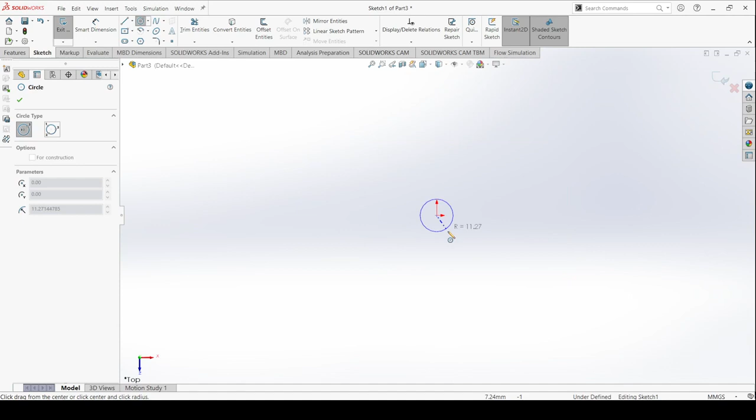We're going to start by drawing a circle because the general design of our vertical wind turbine is circle based. Click and size it anything for now since you can size it later using smart dimension. It's good practice to smart dimension everything.

What smart dimension does is define a dimension set by the software and saved permanently, meaning if you drag the mouse around later it will never change since it's locked into the system. It will only change if you click on it and edit it directly. For this, the units are millimeters, but you can change them to whatever you like.

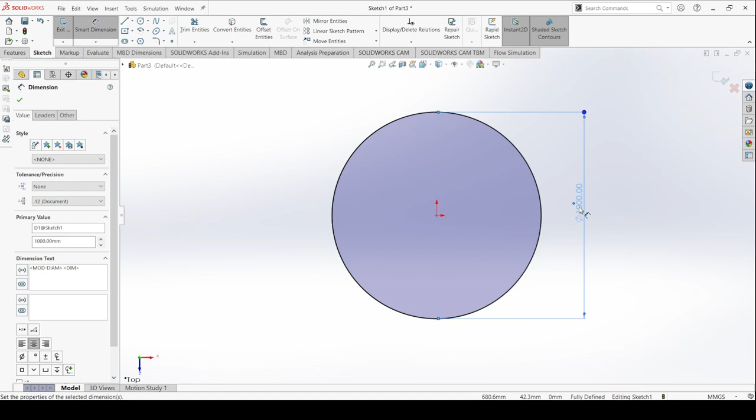I'll delete this and make it 1,000 — that's the diameter of the circle. Now it's dimensioned. Just to make sure it's in millimeters, double click to check. Yep, it's millimeters. Click OK, and now we have the circle drawn.

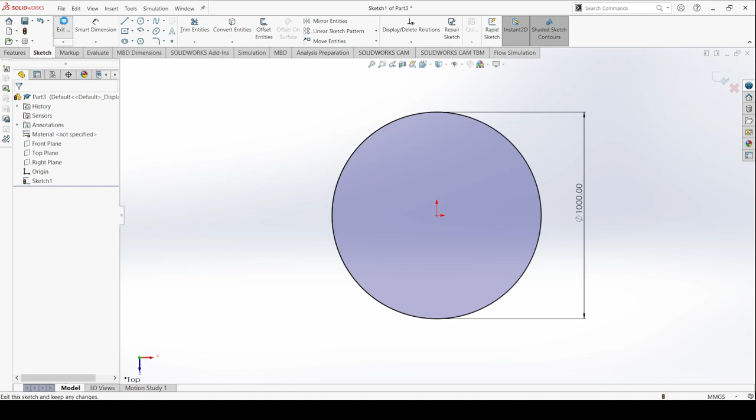We need to go now to Features. If you exit sketch, it will hide, and this is what you have. You can keep the sketch on or off, doesn't matter really.

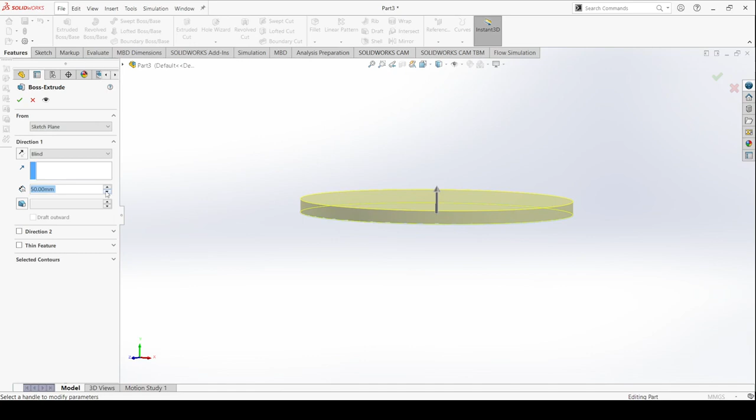Now we go to a feature called Extruded Boss/Base. This arrow shows the direction the extrusion is going, and this is the height, or thickness, of the extrusion. You can increase or decrease it from here. I'm just going to keep it at 10 millimeters.

Here you choose the direction: blind, offset from surface, up to body, or mid-plane. Mid-plane means it will expand from both sides of the plane we drew on. I'm going to demonstrate it now — see? So I'll just keep it blind.

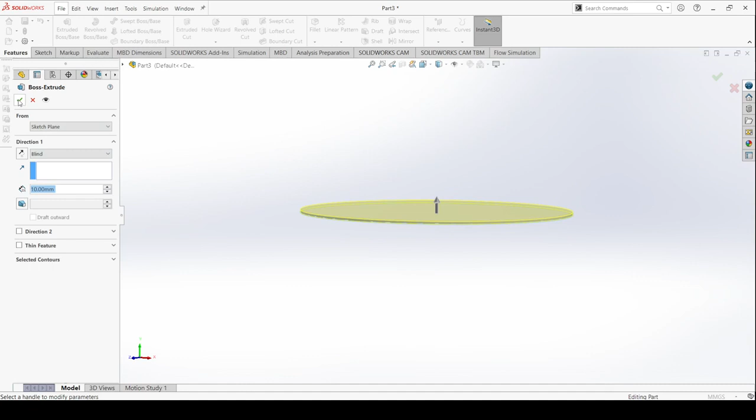Click OK. It's also good practice to define a material, since it's not defined yet. Click Edit Material, and you can see there are a lot of materials here — iron, aluminum, copper, titanium, plastic, other metals.

There's also wood, rubber, and silicon, and all of them display properties below, like elastic modulus, yield stress, and density. So you choose the material you like for your wind turbine — I'm going to choose, just for the sake of it, copper.

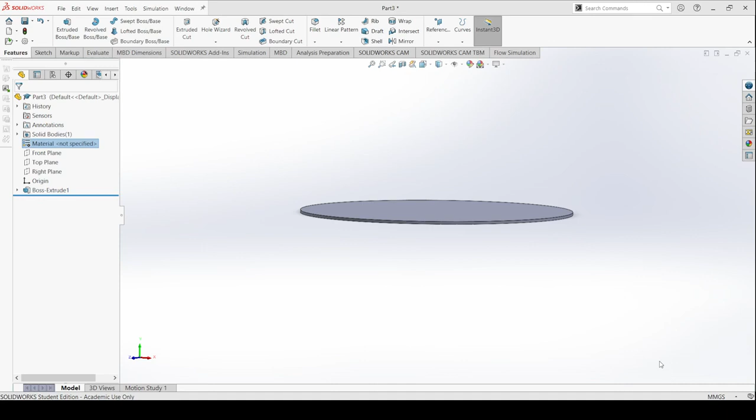Actually, I'm going to choose brass. If you click Apply, see how the color changes. Now click Close.

Now whatever we build will be from the same material. You can change it later and define each part individually, but it's good to set it from the beginning since everything we build will share the same material. Now we're going to start building and drawing the blades.

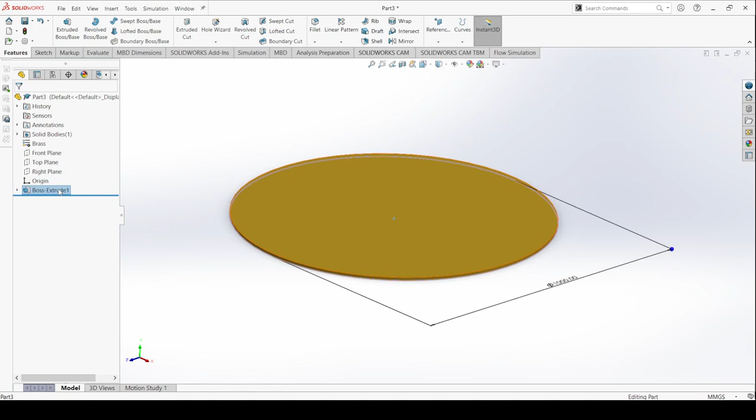For the blades, we need to sketch. This is the original sketch without the extrusion, but we don't need that — we actually need to draw on the face itself. I'm going to click Normal To, which will flip it to face me, the original side. You can see, if you click, now this is facing you.

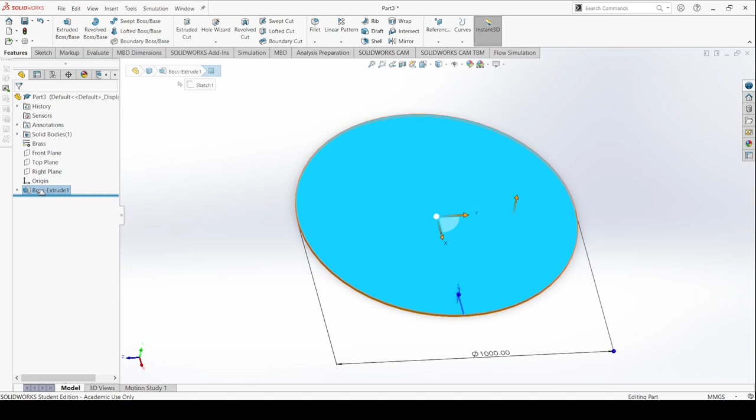Click on the face itself, not Sketch, just the face. Now you see it shows this face, not the bottom, just the top. Click Normal To — so we chose this face. Now if we click Sketch, it will sketch on this face.

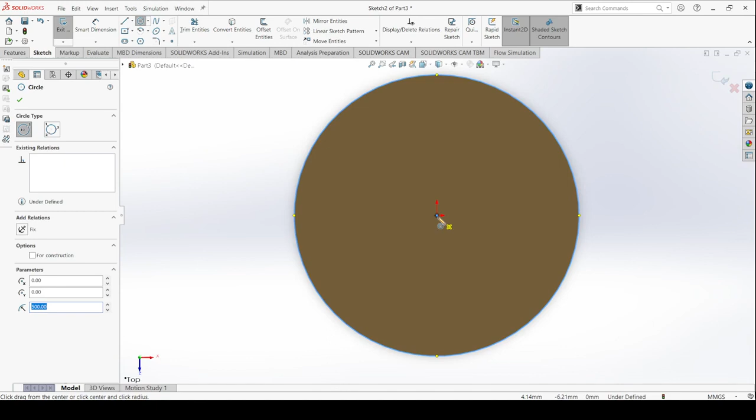I'm going to click a circle, choose the middle, and draw the first circle out to 500. The second circle we need to define the width of our blade — the smaller the circle, the wider our blades will be. So I'm going to keep it around 370 or 375. I'll click here, go down, and define it as 375 millimeters — that's the size.

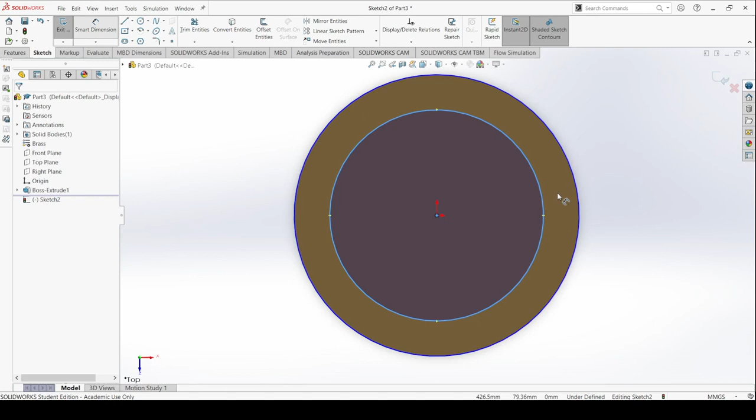You can smart dimension those as well if you like. So if you click here, we'll dimension it as 750.

Okay, and here as well it will define this is the same. This will help you if you're trying to make drawings from this later, if you're trying to build it actually and you want to print a paper. Click OK. Now we have it defined.

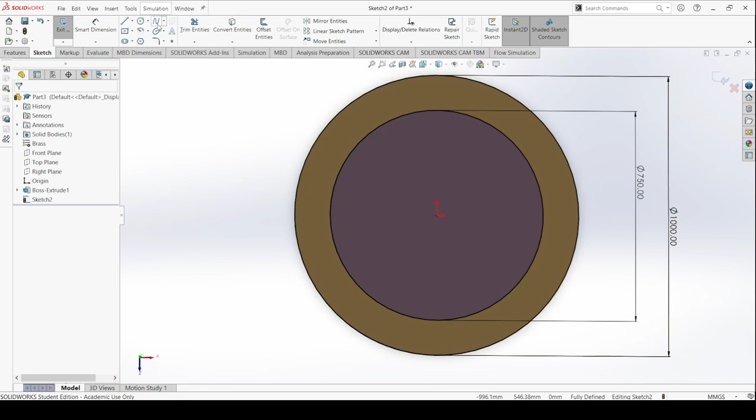Now we need to still draw in this face, and we need something called a spline. Why do we need a spline? Because a spline is easy to draw and manipulate. Start from here and click in the middle anywhere. You can change this later as well, I'll show you how. Now to exit the spline, once you're done, just click escape.

Make sure everything is connecting to all the lines, because this is very important. Now see where we clicked. Whenever you clicked, if you move, we'll create a curvature, so it depends on how curved you want your blade to be. Right now we can curve it this way. We can run simulation and run it again to a different curvature and see which one fits your project.

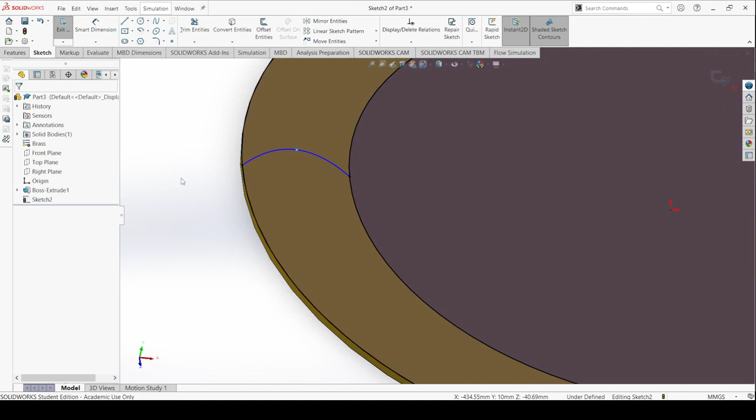Click OK, and now we go to features. I'm putting this to the side just to show you a better view. Extrude, and we click here on the line to extrude it. But see, it's a bit thick, so if you want to change the thickness, go to thin feature. Do not unclick this, just keep it.

Here is 10, let's make it 5 millimeters. See, it became thinner. And here we define the height.

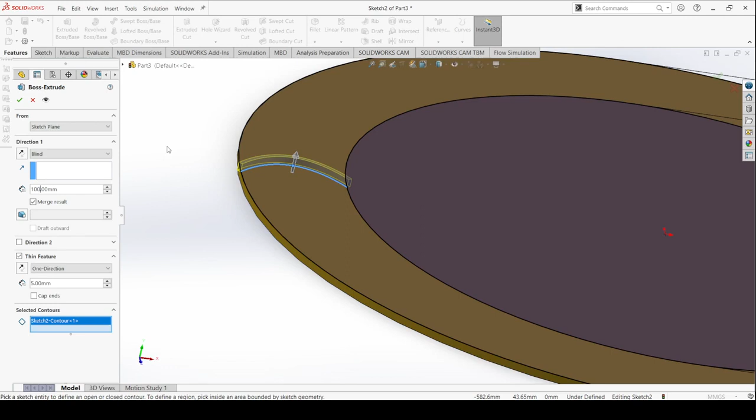Make sure you untick merge result, I'm going to show you how now. I'm going to keep it, going to give it a height of 1000 as well, or give it a height of 1050, whatever you like. This is a preview, you still haven't created the part. You can see how tall it is. If you want to shorten it a little bit, you can do so by reducing the height.

I'm just going to keep it, but I need to untick this. Why? Because if I don't untick this, whatever I'm extruding will join with this and become one part. This will make it hard for me to manipulate the drawings later, or to actually create the part and copy and paste it anywhere, or duplicate it. So unmerge - you can merge them later as one part in the setting if you want to.

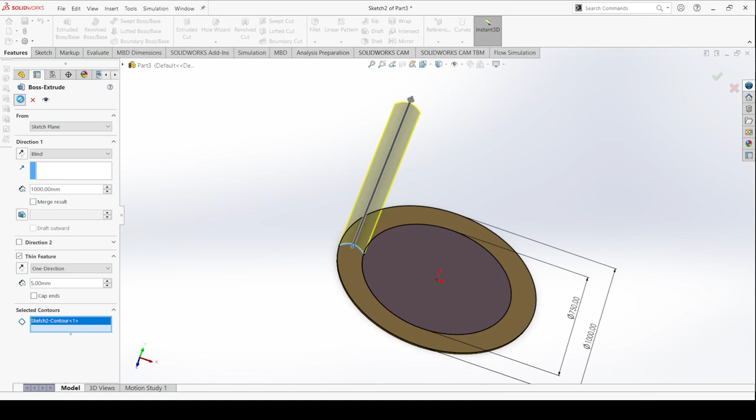Now we click this. See, now we have the part drawn here.

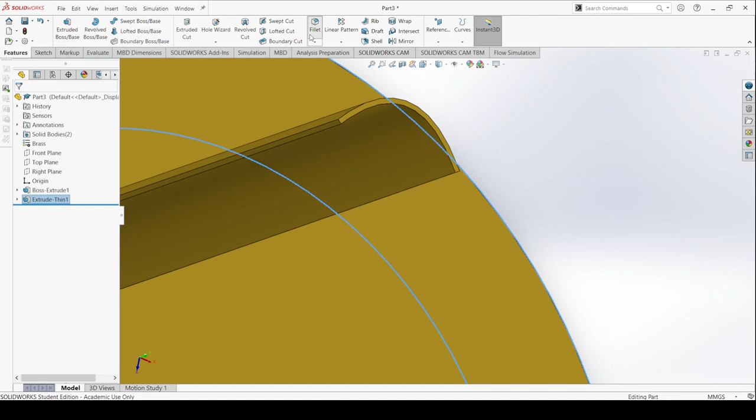Since this is a blade and it's interacting with the wind, it's also good to make it a little round, and to do so you choose a feature called fillet and click this edge and this edge. But because the radius is a bit large, it will give us an error, so you need to change the radius, because it treats a fillet or a corner to smooth it, like a circle, so you need to reduce it so it will be logical.

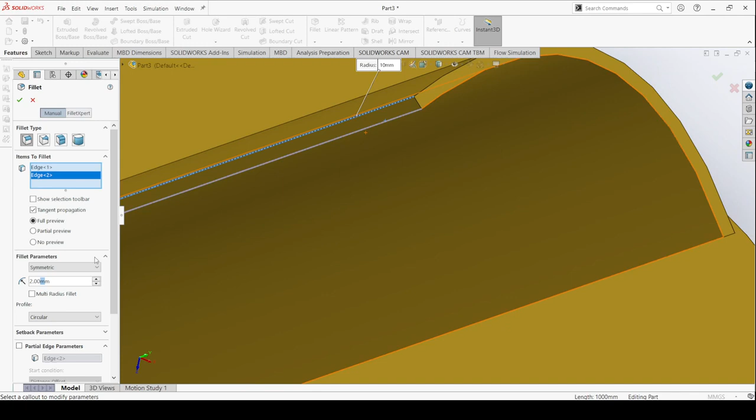Let's see, 2 millimeters, and see how it goes. Alright, there we go. Here, let's increase it to 3 millimeters, try to get as much result as we can. Oh, this is better. So just click OK, or you can just, while you're doing it, go to the other side and click here and click here and click OK.

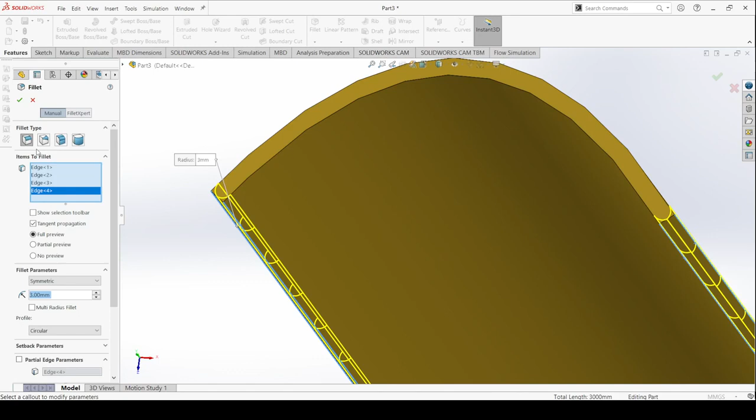The reason we're doing this now is because we're duplicating this part, so we need to make it as good as we can, then we duplicate it.

Now since this is a circle and this is a part, you can copy and paste and try to adjust it, but it will be a very hard process, because you want to align all the blades at even distance in this circle. So we're going to use a feature called linear pattern, but click on the arrow and make sure we choose circular pattern.

Click bodies. See, because we didn't merge this, we can choose it on its own. If we didn't untick the merge, and we click, it will choose the whole thing, because this one and the base are merged together. But now, since it's not merged, we can choose it by itself. Now choose equal spacing, 360, and the number of blades.

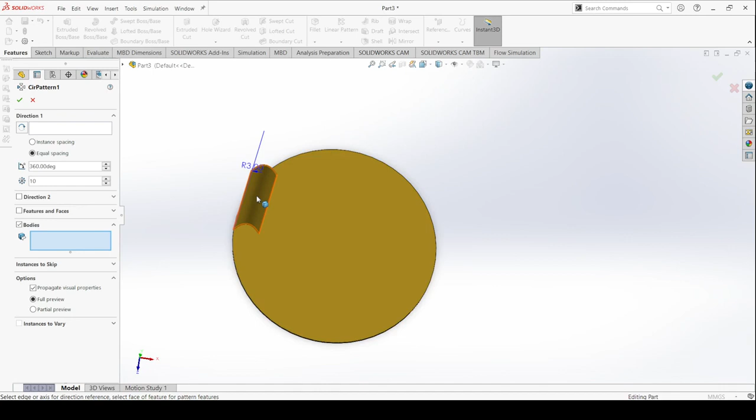Okay, I'm going to see - no, actually choose the fillet. We don't want the fillet, we want the part itself. Okay, oh sorry, clear selection, going to choose here. Okay, and yeah, click OK.

Okay, select sketch. We need to go here, actually, not here, and just choose this. Okay, choose bodies. Click here. We are facing a problem, just let me figure it out.

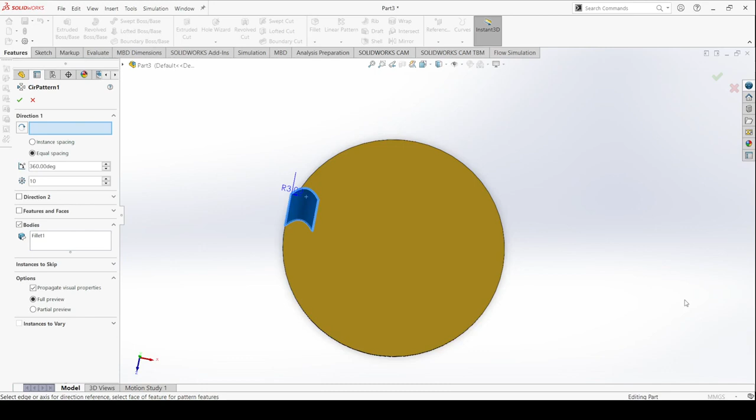I need to choose this part because we need to be circled around something. You can increase the number and decrease it as much as you like. Here's 10. This is a preview, meaning it's not created yet, so choose blades that fit your project. I'm gonna keep it at even 10.

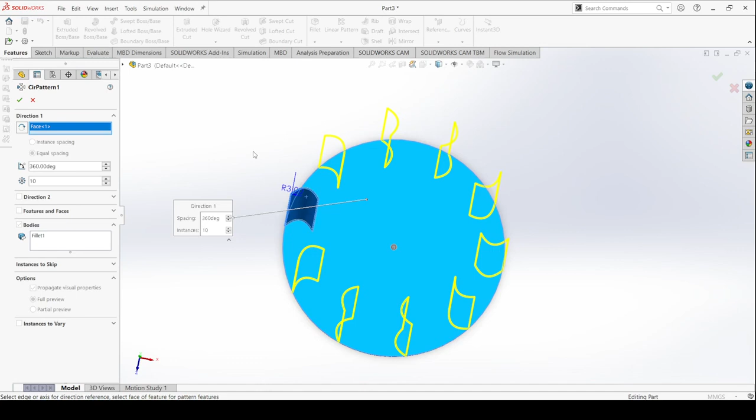Okay, it's a bit slow. Now 10, and click OK. And now click OK. Voila, see, it's created at the same height, at even distance of each other.

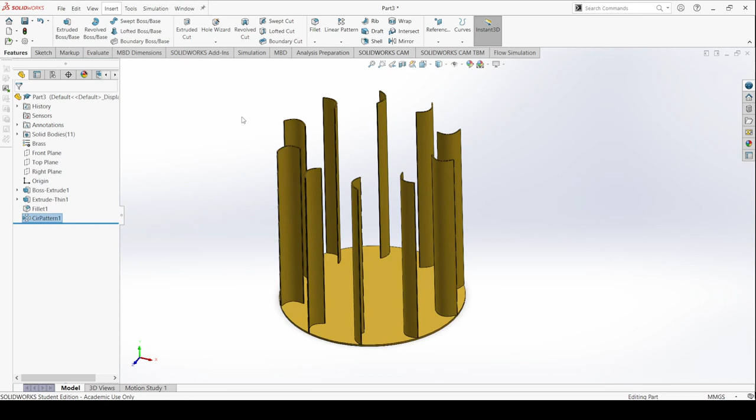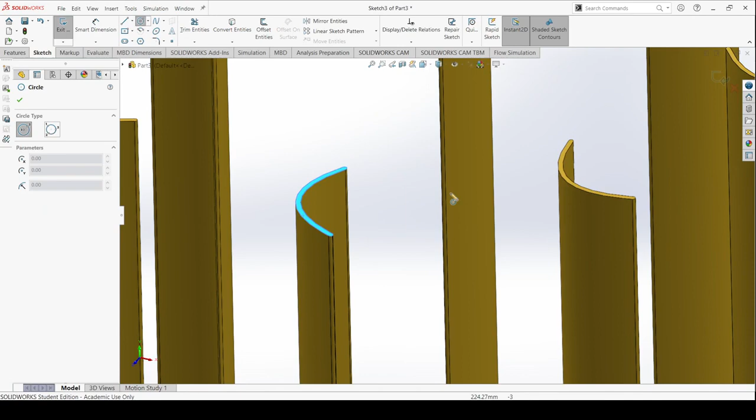What we want now is the final step of completing our turbine: to draw the top plate. To do so, to make sure you're doing it correctly, just go to the face here, the top of any blade, click sketch, click circle. Why? Because we want to make sure the circle we're drawing actually touches all the surfaces of the blades, and since they are at the same height, choosing one will be sufficient.

Okay, just put it at any size and size it as before. Okay, 500. Okay, and click OK.

Same thing. There are actually many ways to do this. You can extrude, copy this and put it here or something, but this is much easier, much more convenient. And extrude.

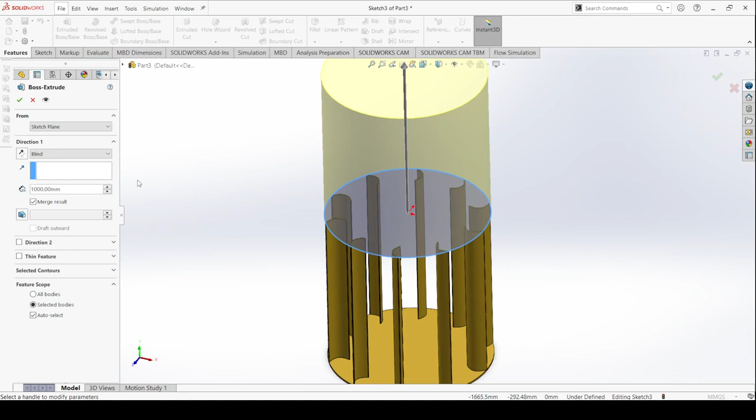It's going to extrude this to a very long height, because last time we actually chose this feature when we chose the height of the blades or the height of the turbine, plus or minus 10 millimeters. Okay, there we go. Now click OK.

We did merge this with those. You can unmerge them. Okay.

Now we are done with our wind turbine. Okay, this is the final product. Click Save and save it where you desire.

I'm going to save it in this file and just call it VAWT, vertical axis wind turbine. Okay, click Save.

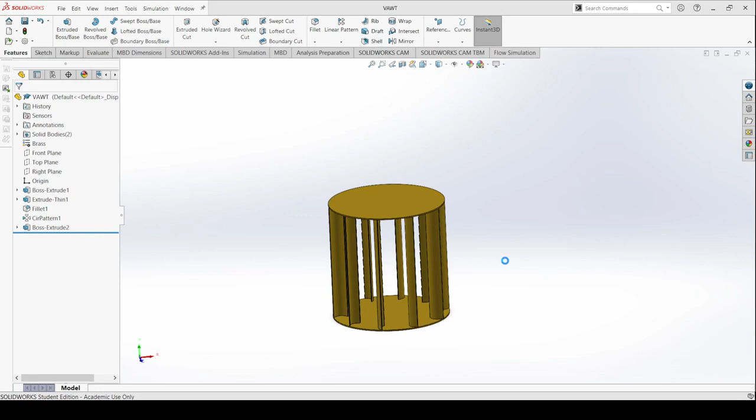And now we go to File, New, and for this we're gonna just draw a tunnel, a test tunnel. We're gonna need it to conduct our flow simulation.

Choose top plane, right plane, whatever you desire. I'm just gonna keep on top plane, since I started drawing on top plane in the first place.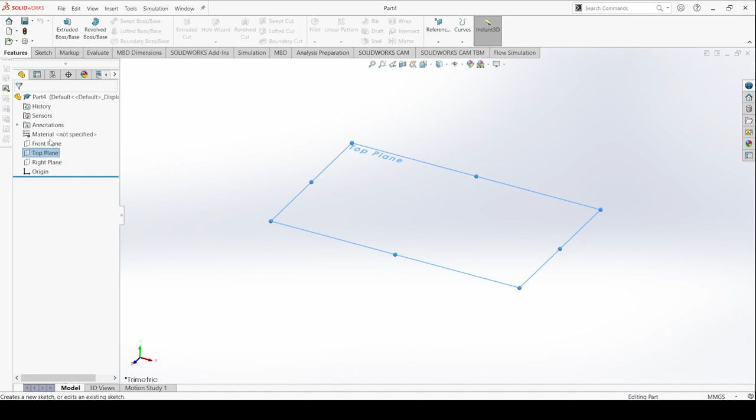For this we're gonna choose rectangle, but I'm gonna choose center rectangle, so I know I drew it from the center, and it's very convenient. I'm actually gonna click undo, and sorry, center, and now...

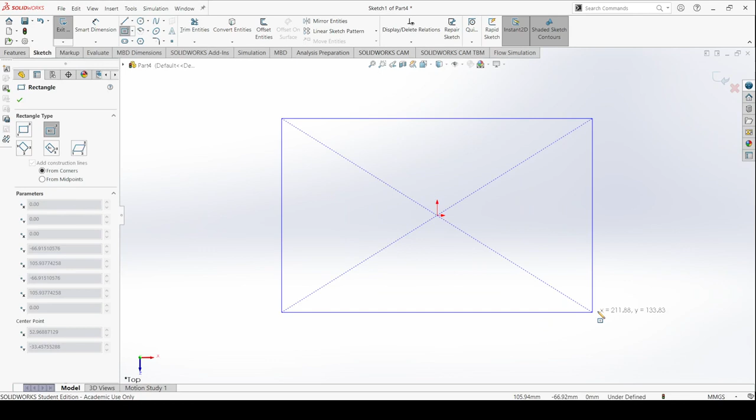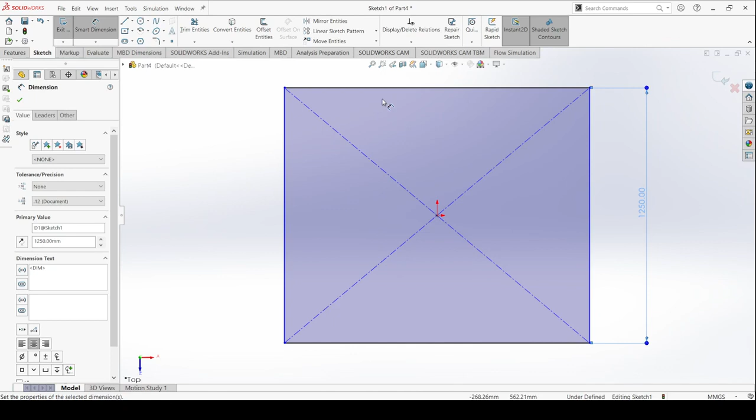Okay, just any shape, because you still can smart dimension it. I'm gonna smart dimension it a little bigger than our turbine, because we're gonna place our turbine here. So I'm just gonna make it 1250 millimeters. Okay, same here for this side, or the bottom, doesn't really matter.

Okay, 1250 millimeters. Okay, now it's fully defined.

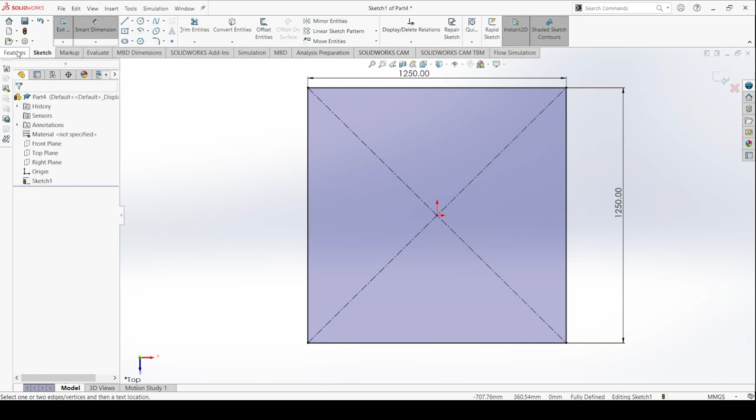Go back to features, click extrude, and for this we are going to choose mid plane and make it, let's just make it 1300 millimeters. Okay, now we have this box. Click OK.

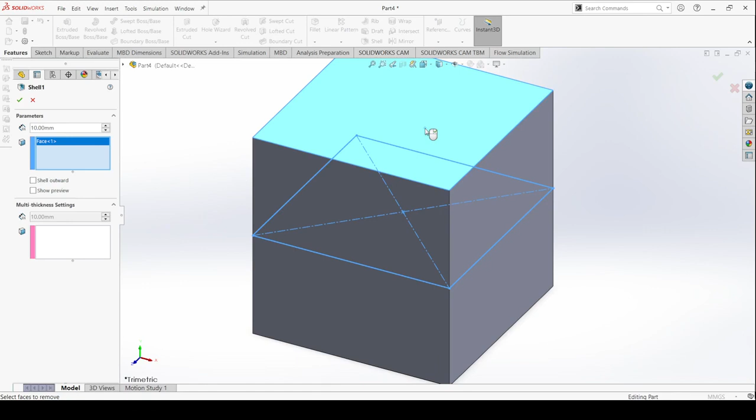We've got a feature called, because we want to make a tunnel, we go to the feature called shell. Choose here and flip it, and choose here, 10 millimeters. That will be the thickness of the walls of the tunnel. You can increase it to 20, whatever you like. I'm going to make it 20. Okay, click OK, and now we have the spot.

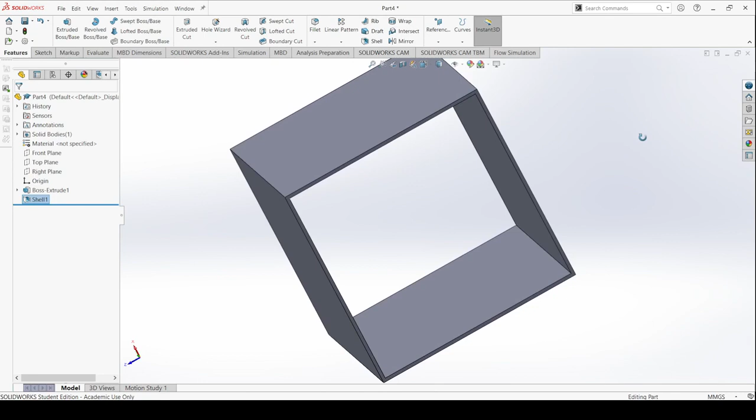Okay, now after we created the shell, we need to save it, because we're going to join these two parts together, and then I'm just going to call it wind tunnel. Click save.

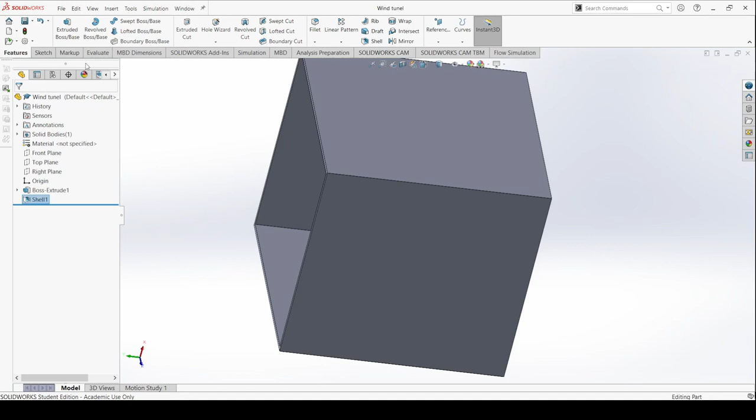And now you can close all of them because you already saved them, and start anew, but this time do not choose part, choose assembly, because you can assemble those two parts together.

It's taking a little bit of time, but be patient. Now it is opening. Okay, see how it's already located the two files. Just click open, choose them and click open.

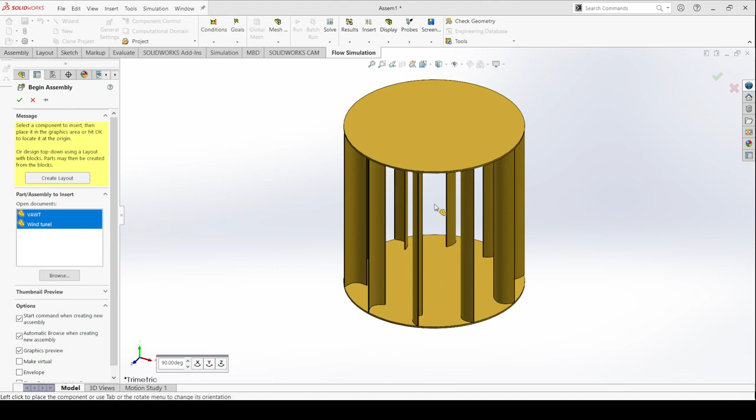Just click anywhere, just place it anywhere, and the tunnel itself, you can place it anywhere. Okay, and now just...

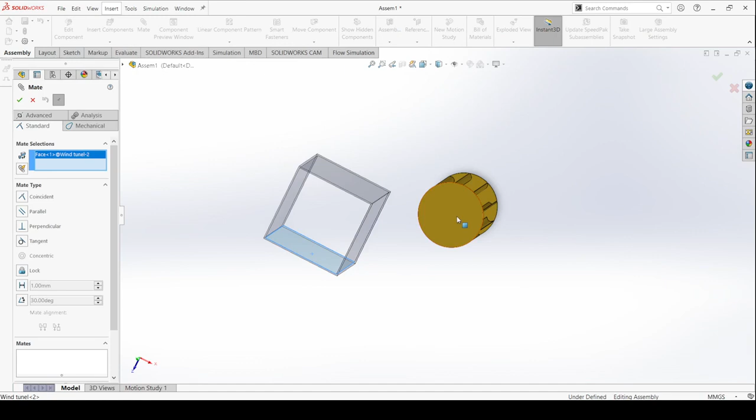To align these two parts, you need to choose a feature in SolidWorks called Mate. Choose the inside of the box with the surface and just click OK. It's supposed to be Mate, but what you need is go to Advanced, Profile Center, okay, and click OK.

Okay, make sure that you click OK.

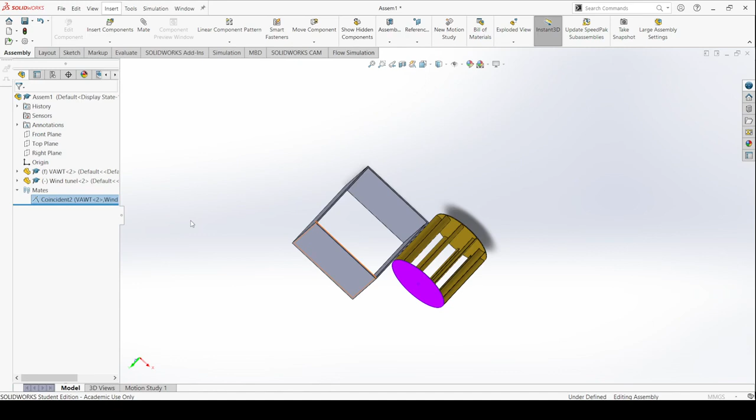Now we edit the feature. Because we chose this face with this face, go to Advanced, click Center. See how it did it? It actually took it to the center of this face. Now you click OK. You can make it a little bit further if you like.

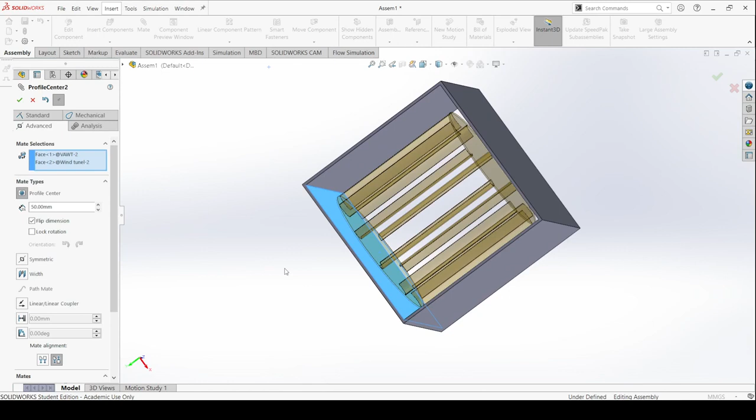Because of the axis we're having, it's actually going the other way around. You can flip dimension, and see now if you increase, it will actually keep a gap between the face and the bottom of the plate of the turbine, but it's gonna still stay in its place.

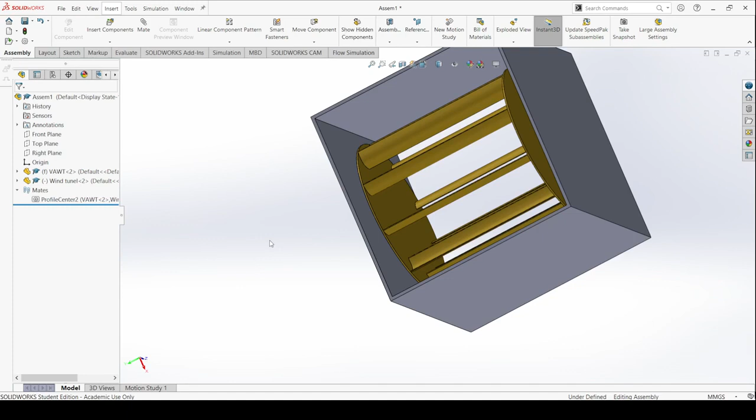Now we click OK. Now after we click OK in Mate, now it's saved. Before it was not saved. Now we can click here just to make sure it's facing us, but it's the other way around.

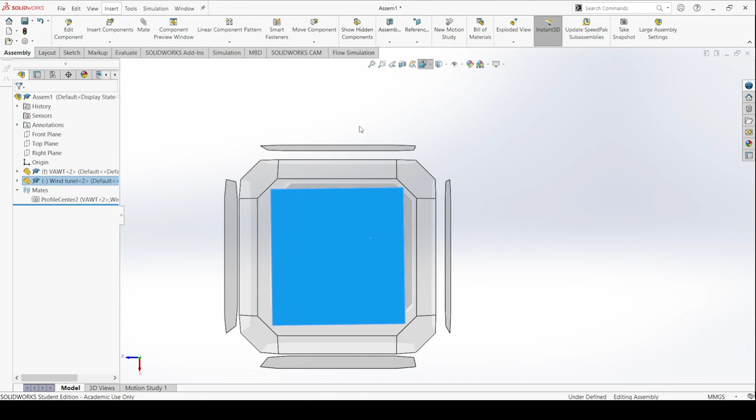Okay, now this is how we want it. Now click here. Now see, there we go. We now have a full view. Notice how this is made with this as one solid piece.

Okay, and now we are ready to do our simulation.

We need to save it, then give it any name you like. I'm just going to create it as Assem1, which means it's short for assembly 1, and just click save.

And now to go to simulation, you go to this tab here, or if you don't have it, you go to tools or search here and click flow simulation, and you can add the add-ons. Click flow simulation, you need to go to wizard.

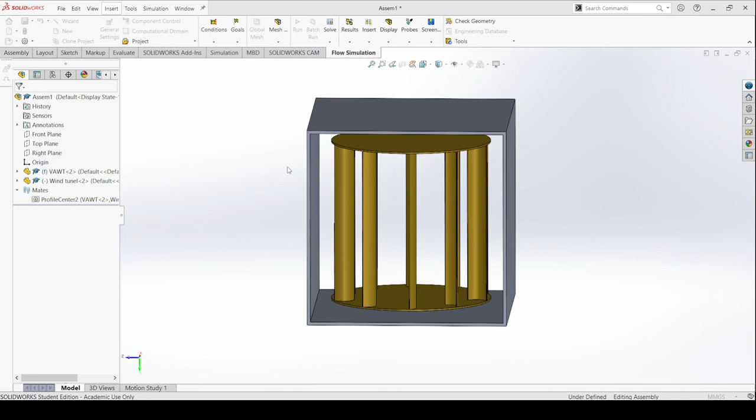Project 1 or project, I'm gonna call it project wind. Choose the units. I'm just gonna keep it as SI units because it is widely used, and very favored by many.

Now for this we need to choose internal, and the reason for that, I know it's a wind turbine, it's supposed to be external, but because we are creating a tunnel, so we are studying the inside, so we're going to keep the flow that we're going to study as internal.

Choose rotation, you can choose gravity and other things, but I'm just going to keep it at rotation. Click next, choose the fluid because it's a wind turbine, it's going to be air.

Click add, laminar and turbulent, keep it this way. Humidity you can add it or not, depends on what you're trying to achieve.

Click next, see the parameters, everything is okay. Click next, and now we're almost ready. But now it says because we're doing a tunnel, you need to create something called lid, and by itself it's warning you to create a lid because of the inlet and the outlet.

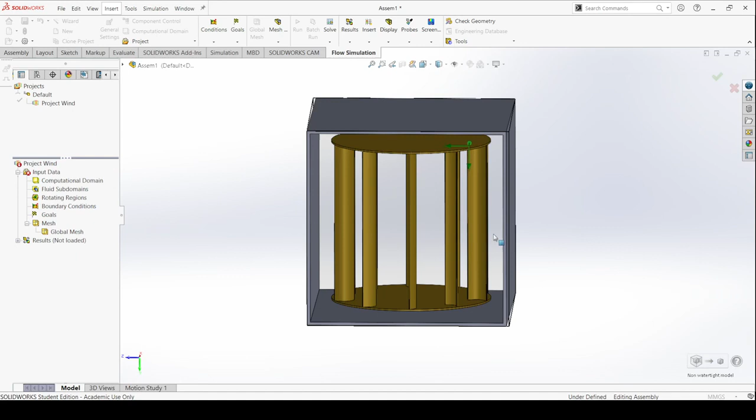Click here and click this face. Let's zoom in. Okay, click here. It's the first lid and the second lid. Choose here. Now it's sealed.

Something I forgot to do, click yes, and also click yes before we start, because I need to actually go back here and click... leave the wind turbine. We need the tunnel.

I'm just going to click, you have two options, either hide or change transparency. You can choose this, see how it became a bit transparent, but I'm just gonna actually hide it, much better. Hide component, see, now it's hidden.

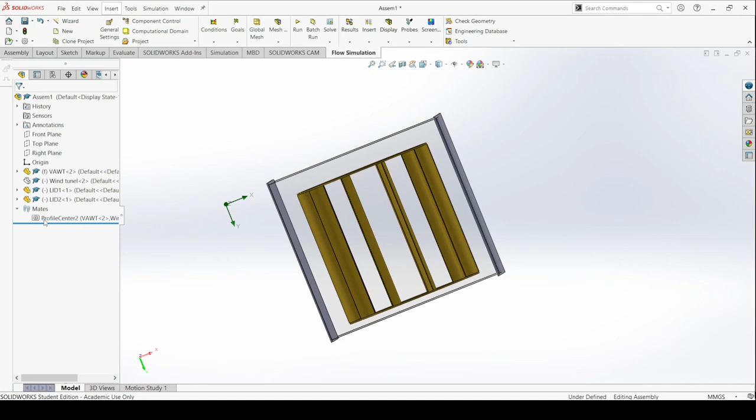Okay, I'm just gonna go normal to. And see how the wind turbine is now facing us. Choose this. Okay, see the axis?

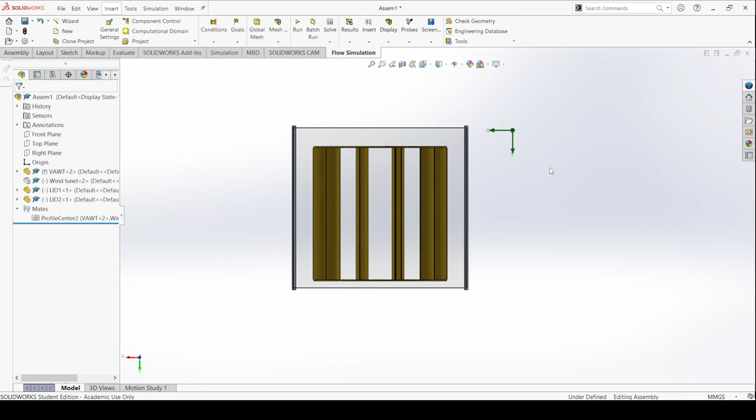This is very important. Now go back to the simulation project. Click on this, this is our project wind. This is the computational domain. Choose it, it's already defined.

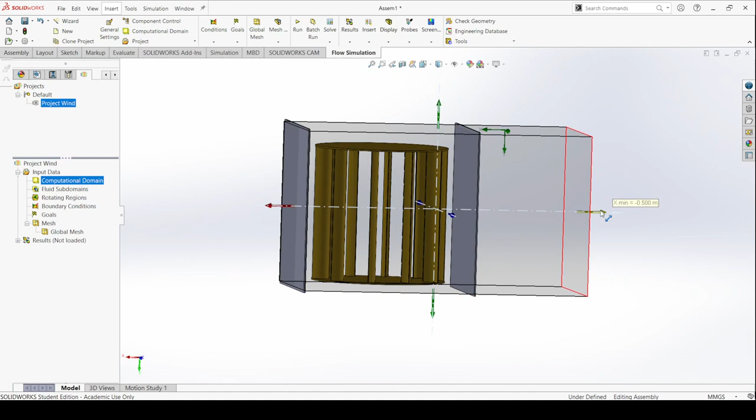You can pull this way a little bit further because all the computation is going to happen in this domain. Now since we already define our main domain, computational domain, now we choose fluid.

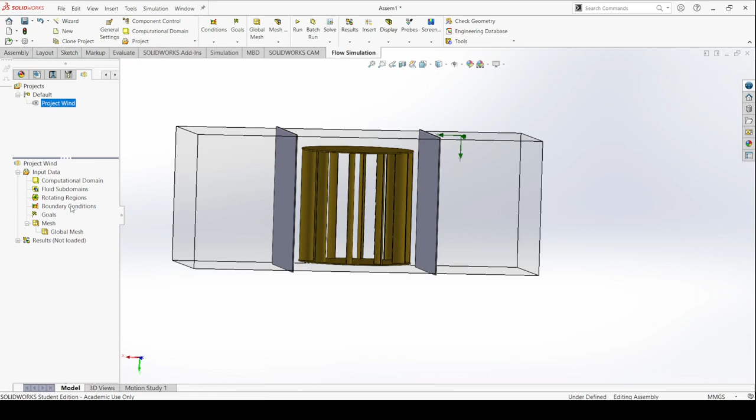Sorry, I mean boundary condition, insert boundary condition, and for the first boundary condition we need to select, there is inlet mass flow, inlet mass flux, but for this we need inlet velocity because we are studying wind and velocity is very important. Choose this face from the inside, mind the arrow of the axis, let's go in the same direction. Okay, that's good. Keep this reference axis as X and click OK, and we are done with our first boundary.

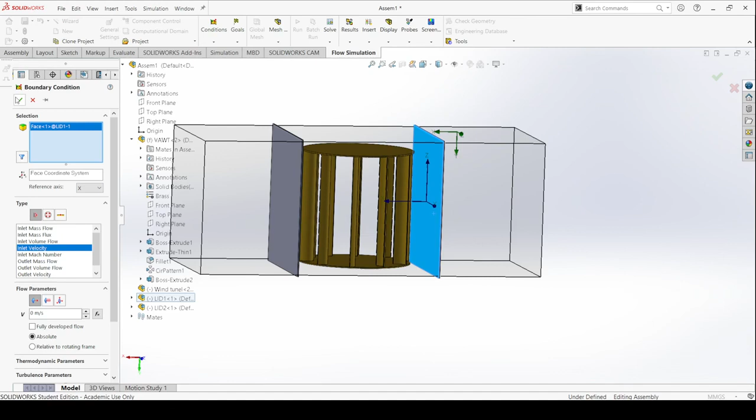Make sure, see how the arrows, so if you're skeptical, because these are a bit closer to each other and it's very difficult to see the study you're running, you can always go back to the original drawing and just edit it.

Okay, for this I'm just gonna go here and just gonna go okay, just 1 second.

Okay, because I was hiding the part, that's why I couldn't edit it, but just click here, unhide, and then you'll find this toggle, edit part. It will take you to the original part.

Just click the arrow here, it will show you where you did your first extrude, and just edit this feature.

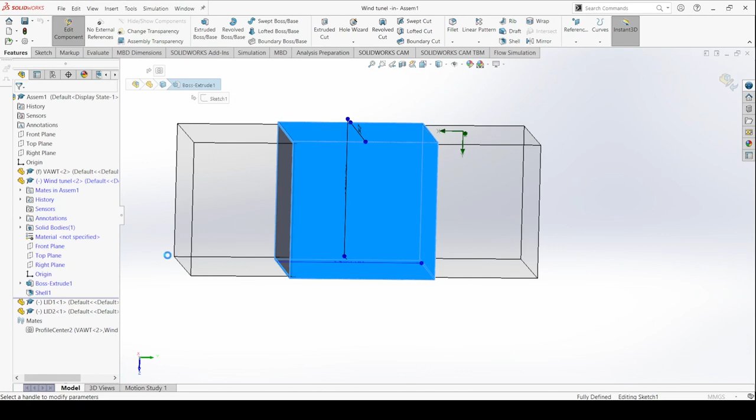Okay, we'll make it 2000, or you might make it 3000. Oh, that's a good length. That's a good length for our study. Click OK.

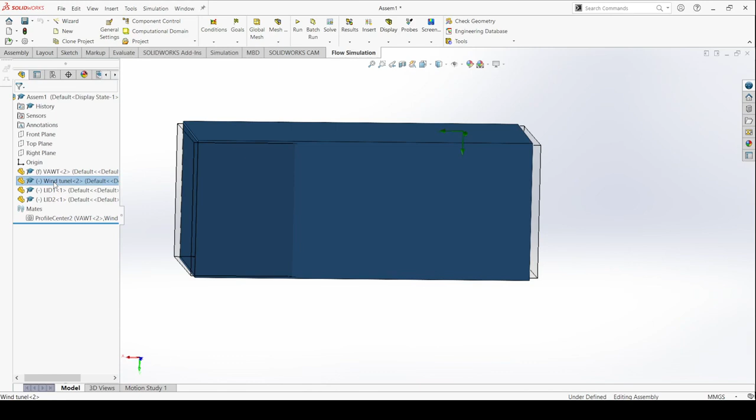And now click here on the edit component. Now it's good, we've already done everything we need. Oh sorry, go back, don't forget to hide it. It's not that we don't need it, we need it, but we need to hide it to see the study. But we need to change now the lids, because we already changed the wind tunnel.

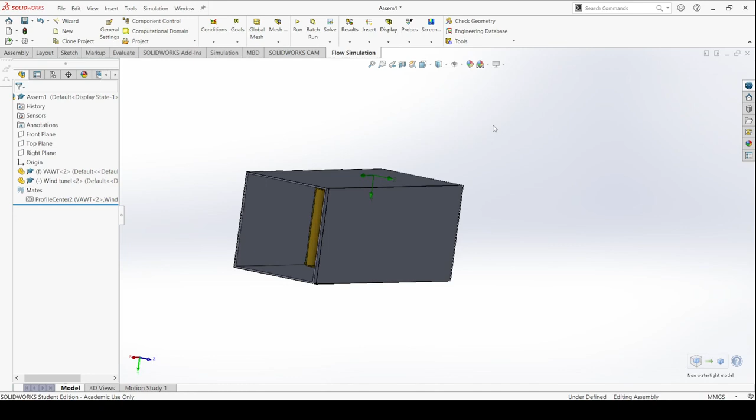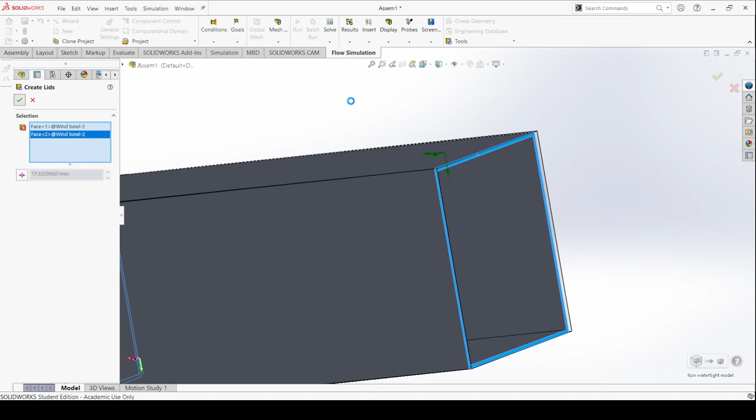After deleting the previous lids, we need to create new lids, so we go to Tools, Create Lids, and click this face and this face. Click the two faces and click OK. Now we go back to lids. Just click yes, because it needs to compute again since you are creating new parts to your assembly.

And go to the wind tunnel. I'm going to hide it. Now we are ready to insert our boundaries and then run our studies.

For this we're going to click here, insert boundaries, right click, and choose the inside of the lid, and choose inlet velocity, because we're going to study the speed of the wind. Try to make it, let's say, 5 meters per second. Click OK. See the arrows here.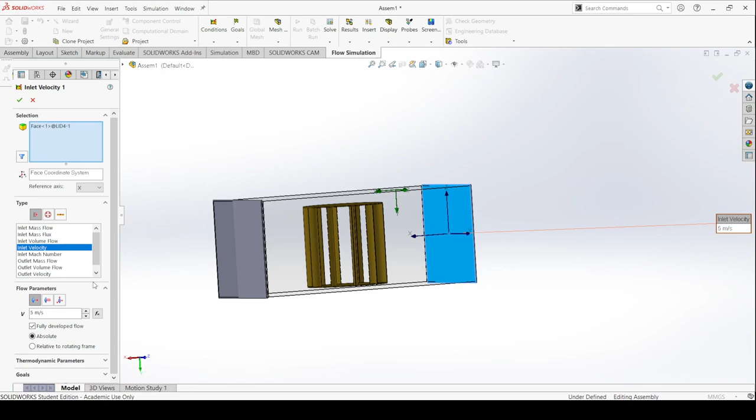You can edit this if you like. Just click edit definition, it will take you back to this window. You can choose spiral or 3D vectors, normal to face, and many other things you can manipulate. Fully developed flow - that's actually better. Click yes.

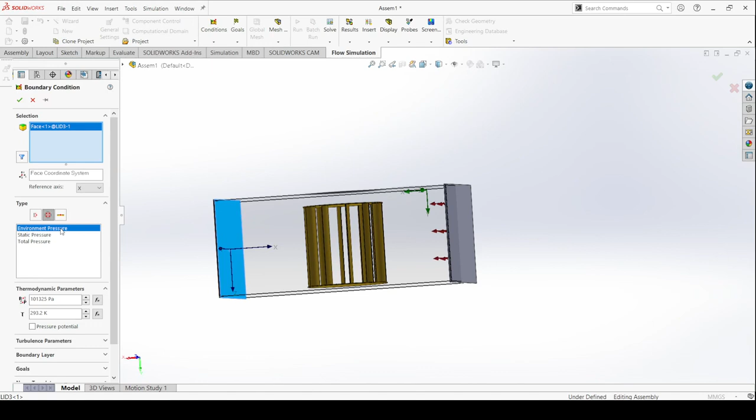And for the second boundary, we need pressure. For this you need to click this tab here, environment pressure. We need the environment pressure, just keep it like that. Click yes. Now we are ready to run the simulation, run the study.

Click run, it will take you to this, and click run. Another window will appear. Click here - you can see how the solver solves the equations. You need to solve all this until it reaches convergence, so just give me a second. Okay, now the solver is finished.

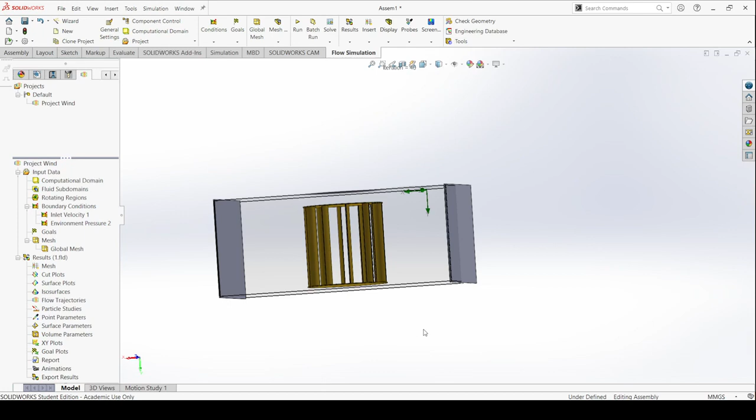Close it or keep it in the background, depends. Now you have results - before it was empty, now you have actual results in it. You want to see how the flow interacts with your turbine, and this is very important.

I'm going to try to make it align to our side, and just leave it on an angle a little bit. Now we'll make this 200.

Flat arrows, fine lines - no, make it lines with arrows, or lines. Just lines are better. And make it, say, 300 lines.

And for pressure, no, actually keep it just this way, and it will show you the lines of the - sorry, need to select the face. Select here, and just click OK.

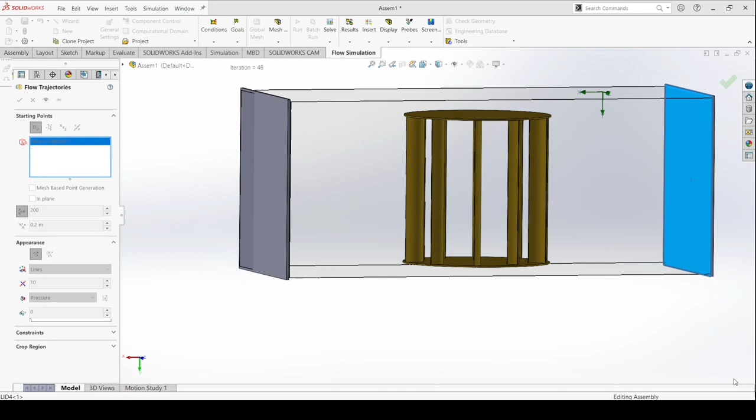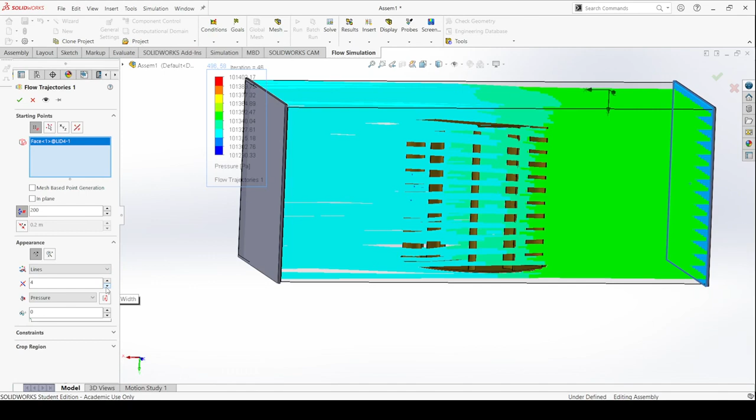Okay, these are very thick lines, we need to edit them. Where is it? Flow trajectories, click edit definition. And planes and mesh lines - okay this is 10, now we need to make it 4. Alright, let's see, oh that's better. That's much better.

Also, you can go play and see how it hits and changes.

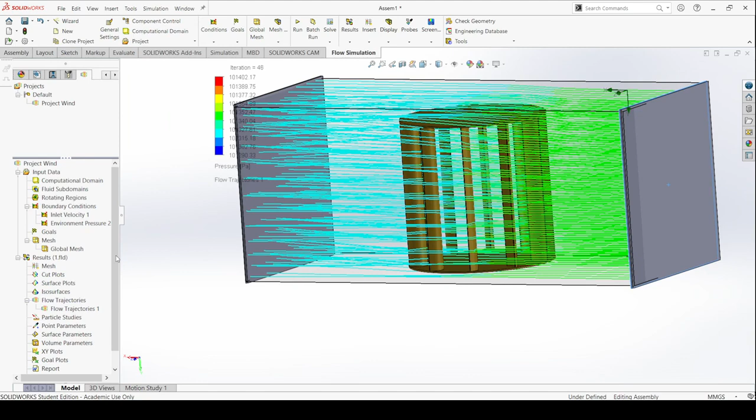Another way to do so is the definition, because we are defining this is the pressure. You can now see the velocity, because we are also interested in velocity - see how velocity changes of the air after it hits your model.

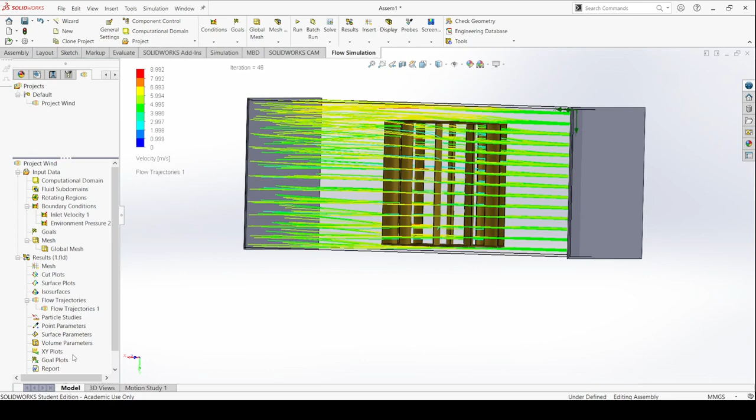Now we are going to also play around with this a little bit, or you can keep this and insert a new one. So if you want to see two things together, let's see here. I'm going to click this, delete it, and keep this as our pressure. This pressure, click OK.

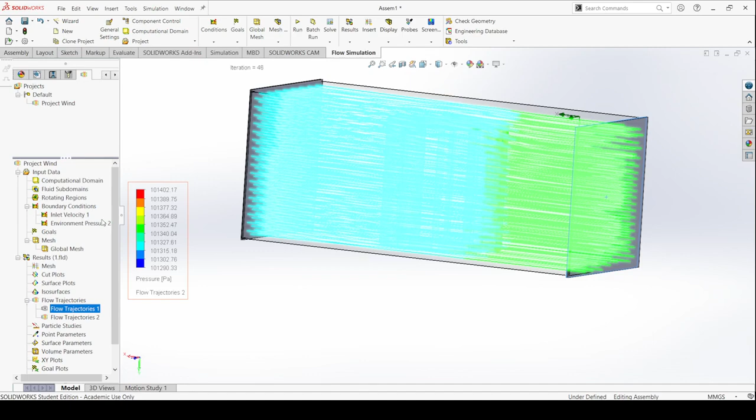Alright, see, it's now a different drawing. I'm just going to hide this and see how the pressure differs in your model. Or insert, you can delete, you can clone. I'm going to actually delete this and this, and insert a new flow trajectory.

This time you want to see how the velocity of the wind interacts with your wind turbine. What you want to do is choose the number, make it 300. We need to choose it as lines, keep it as lines, just lines. The thickness of the lines, keep it at 2.

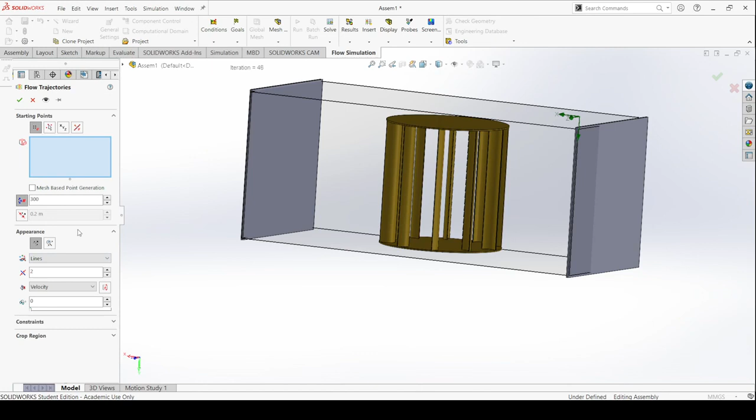And now we choose velocity, and after that we need to go and choose the wind turbine itself. Just choose this and click OK.

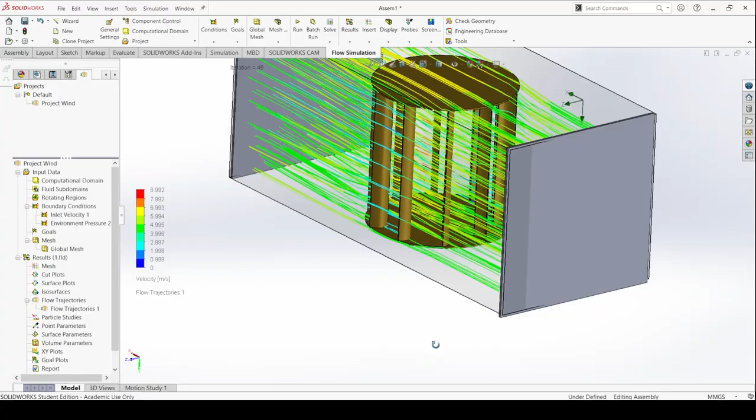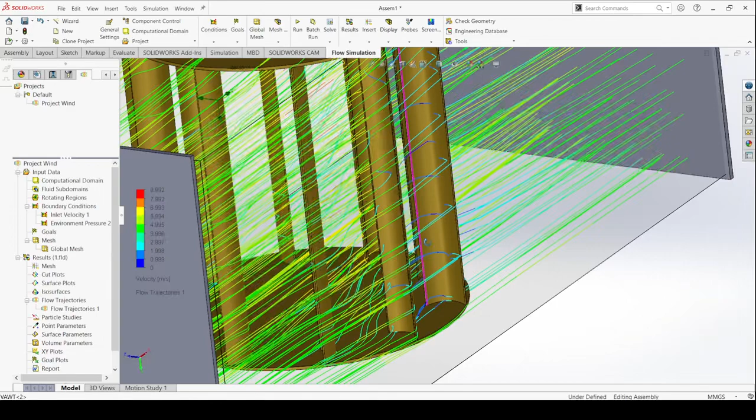See? Amazing. See how the wind interacts with your blade. See how it curves from the top a little bit and goes around it. See inside how it hits the blade and curves around the blades. There's all sorts of things you can do with the...